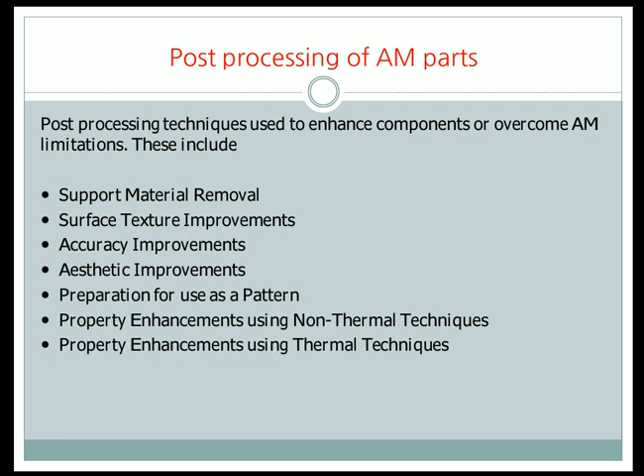So now we shall discuss the first method, support material removal. Support material removal is nothing but the removal of support material after manufacturing a three-dimensional model.

There are two different types: natural supports and synthetic supports. In natural supports, material surrounds the part as a naturally occurring byproduct of the build process. When the product is manufactured, the natural supports surround the part as this byproduct. This will be the same as the base material, and hence is called natural support.

Next is synthetic support. These are rigid structures designed and built to support, restrain, or attach the part being built to a build platform. Synthetic supports are usually a different material from the base material, with a different color to identify them, and are artificial supports or restraints attached to the three-dimensional model being manufactured.

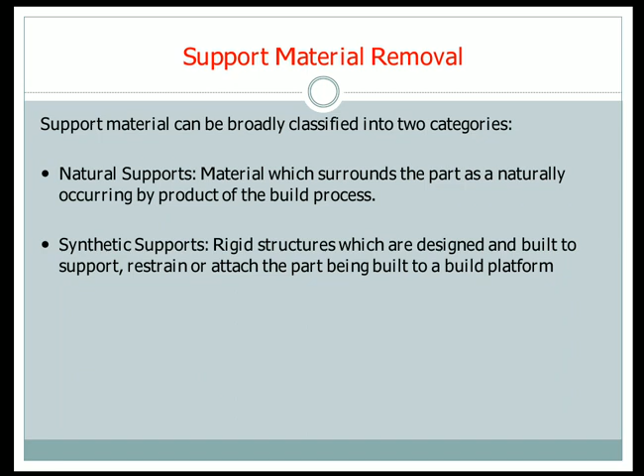Now we shall see this in detail. In natural supports, processes which provide natural support are primarily powder-based and sheet-based processes. Parts which provide support through the natural support method are usually powder-based or sheet-based. All powder bed fusion processes require removal of the part from the loose powder surrounding it.

In the figure you can see automated powder removal using vibratory and vacuum assist, provided by the Z Corporation 450 machine. In that machine they remove the natural material from the three-dimensional model which is manufactured.

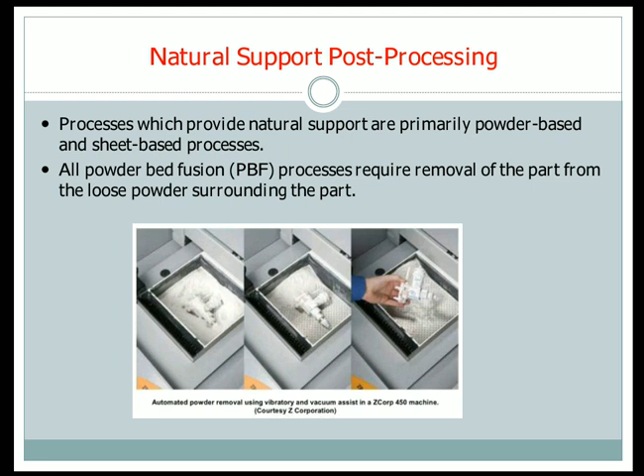Brushes, compressed air, and light bead blasting are commonly used to remove loosely adhered powder. Woodworking tools and dental cleaning tools are commonly used to remove powder that is sintered to the surface - tools like chisels or other sharp-edged instruments are used to remove the natural supports.

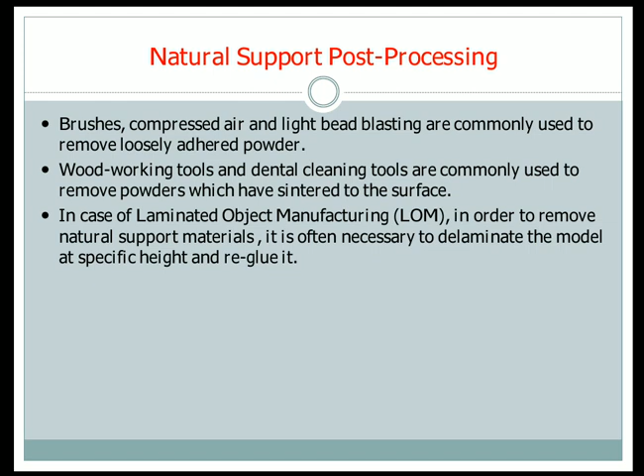In case of laminated object manufacturing, in order to remove natural support materials, it is often necessary to delaminate the model at a specific height and reglue it. Delaminate means removing or separating the base material from the support material at specific height, then regluing it.

In the figure they have shown four figures of LOM, laminated object manufacturing, showing the decubing process or removal of supports. In figure A, the finished block of material - when the three-dimensional model is manufactured by the LOM method, we get this three-dimensional finished material.

We have to take that and remove the cubes far apart. The material which is far away from the real material, we remove first, and after removing that, in figure C they have shown removal of the materials directly in contact with the base or main material. After that, in figure D they have shown the finished product, the final product we are going to manufacture.

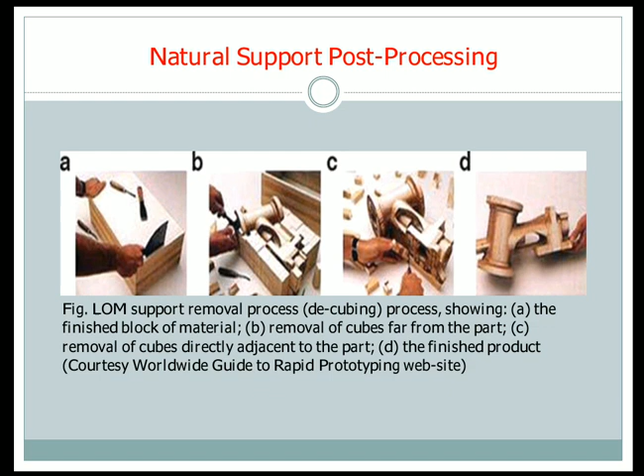Next method is synthetic supports. Processes which do not naturally support parts require synthetic supports for overhanging features. There will be some applications where overhanging or extra support has to be given, and in these cases synthetic supports are provided.

These can be made from build material or from secondary material. The material used can be the same as the base material or a secondary material. The color also will be different when compared to the base or build material.

In the figure they have shown a flat FDM (fused deposition modeling) produced aerospace part. White build material is ABS plastic and black material is the water-soluble support material. The white material on top is the build material, and the black material on the bottom is the support material required for manufacturing, which is water soluble.

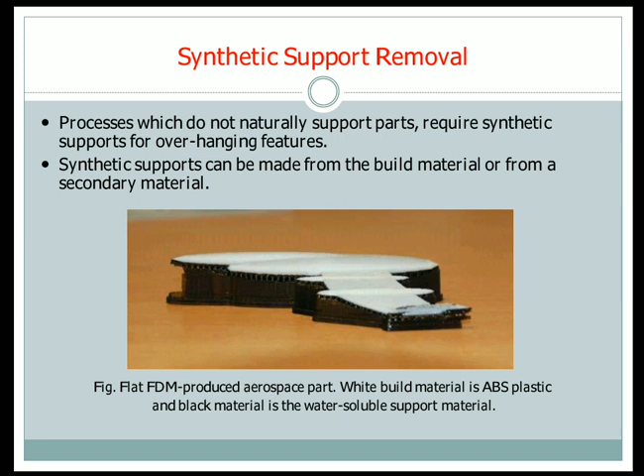The development of secondary support materials simplified their removal, as they are either weaker, soluble in liquid solution, or melt at a lower temperature than the build material.

For extrusion, direct printing, and photopolymer processes, the supports are of low strength and can be removed manually, easily by hand.

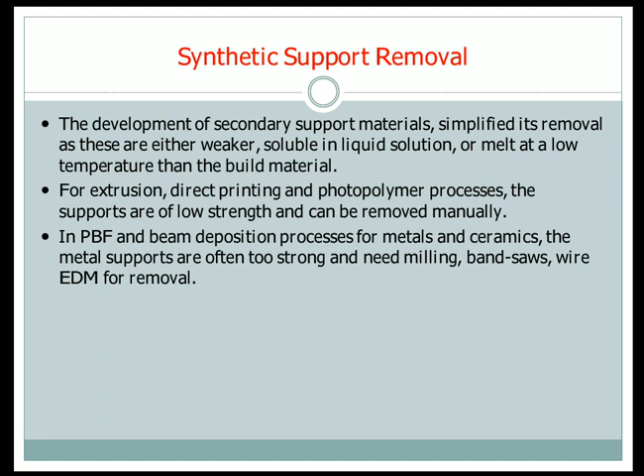In PBF and beam deposition processes for metal and ceramics, the metal supports are often too strong and need milling, bandsaw, and wire EDM for removal. In PBF processes the support material will be strong and we need to remove it using milling, bandsaw, or similar methods to remove the support or synthetic material.